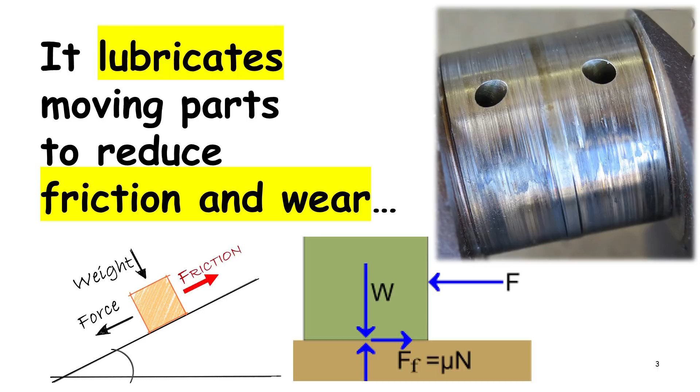But lubrication is only one of 6 key functions that oil performs in our engines. And actually, in my opinion, it's probably not even one of the most important ones. The reason I say that: obviously engines don't last very long running without any oil, and it is important to provide lubrication.

But it's important to understand that the lubrication requirements of our piston aircraft engines, at least the direct drive ones that turn the propeller right off the crankshaft, turn pretty slowly, typically 2,700 RPM redlines. The lubrication requirements of these slow turning Lycomings and Continentals are very modest compared to what we're used to with automobile engines that turn much higher revs.

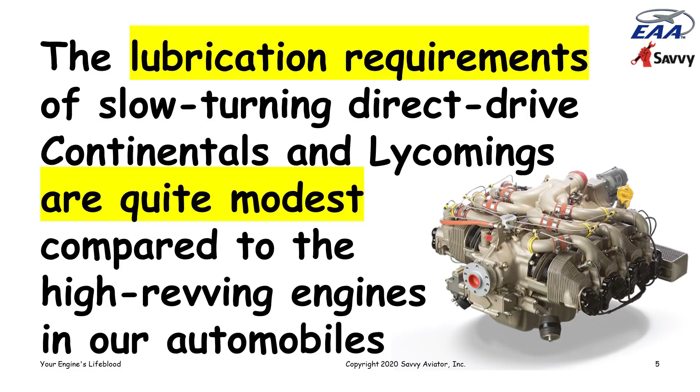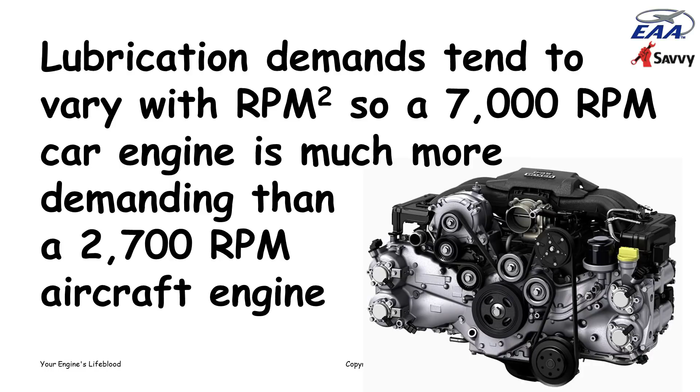And that's because lubrication demands tend to vary with the square of RPM. So a Subaru engine, which is the one I have pictured here, a particularly high revving engine, has a 7,000 RPM redline. Its lubrication requirements are vastly more demanding than our 2,600 or 2,700 RPM aircraft engines. But we will talk a little bit about friction and wear and how oil plays a role there, and then we'll talk about some of the other things that we depend on oil to do.

So the science of friction and wear is called tribology. Friction occurs because even the smoothest metal surfaces aren't really that smooth when you look at them very closely. What you're seeing here on the slide is a scanning electron microscope view of a polished metal surface, and you can see all of the little peaks and valleys on that surface. Those peaks and valleys are only microns in height, but that's what the surface of even a polished metal surface looks like.

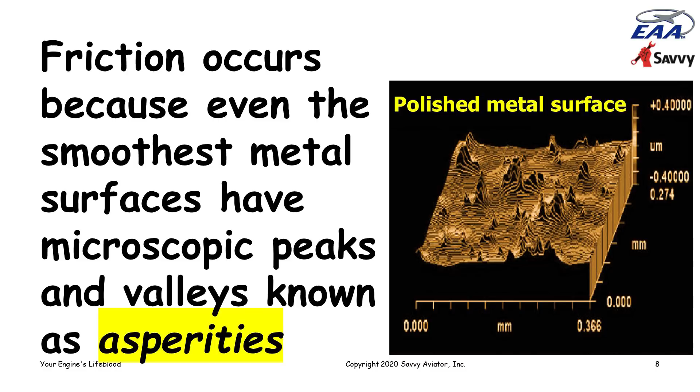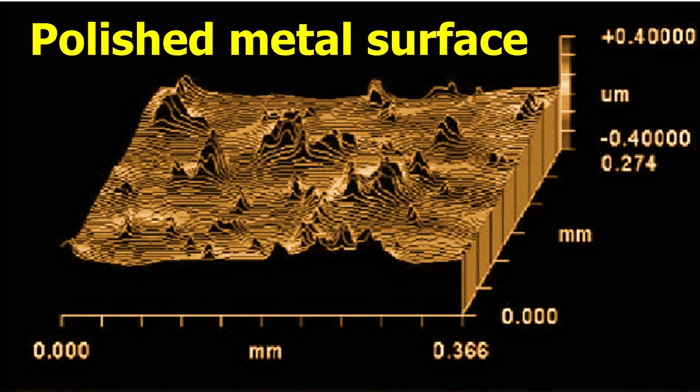The little peaks are known as asperities. Here's a closer look at that slide. The surface of even the most polished metal surface is just full of these little asperities. So if you have two polished metal surfaces moving relative to one another in close proximity, the asperities on the two different surfaces come in contact with one another, and they actually form little welds called micro-welds. As the parts move relative to one another, the micro-welds are constantly being formed and then fractured and then reformed and then fractured as the two surfaces move with respect to one another.

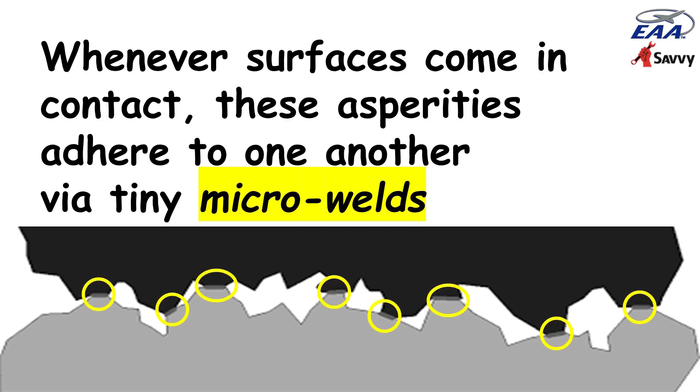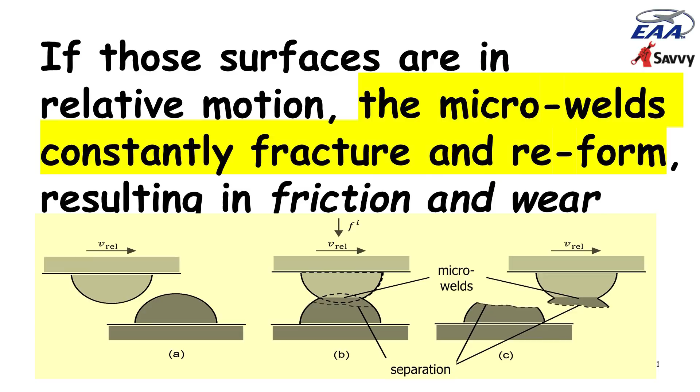Here's a more schematic diagram of that process, where the asperities contact with one another, form a micro-weld, and then as the relative motion completes, the micro-weld is fractured. You can see in the right-hand part of this schematic that part of the metal from the lower surface wound up being broken off and torn off by the upper surface. It's this tearing off of little pieces of metal that is the process that results in wear. So the asperities cause friction, and the fracturing of these micro-welds is the process that causes wear. Friction is the resistance to relative motion.

Wear is the loss of material that results from friction, and both are caused by the fracture of these little micro-welds. So that's where lubrication comes in.

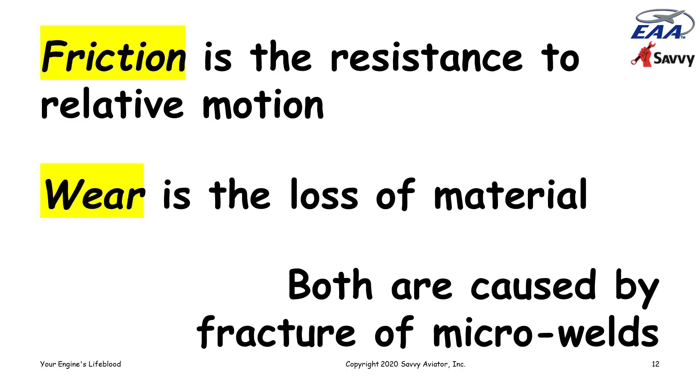The purpose of lubrication is to reduce friction and wear by preventing or trying to inhibit this process of micro-weld formation and fracturing.

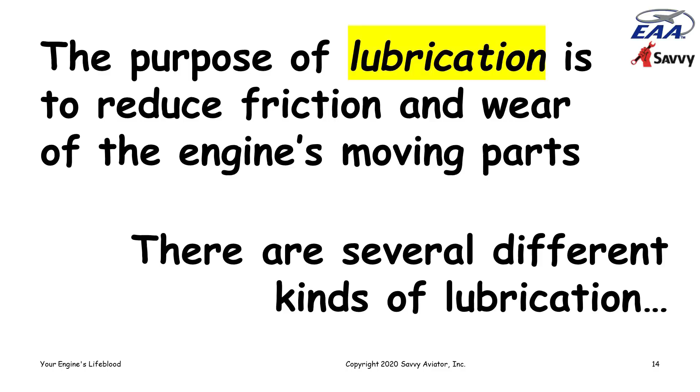There are several different kinds of lubrication that come into play under various circumstances. Probably the most important in our engines is something called hydrodynamic lubrication, which occurs when a fluid is interposed between the moving parts. It's typically a liquid like oil, although it can be a solid or a gas, but in our engines it's motor oil that's the fluid.

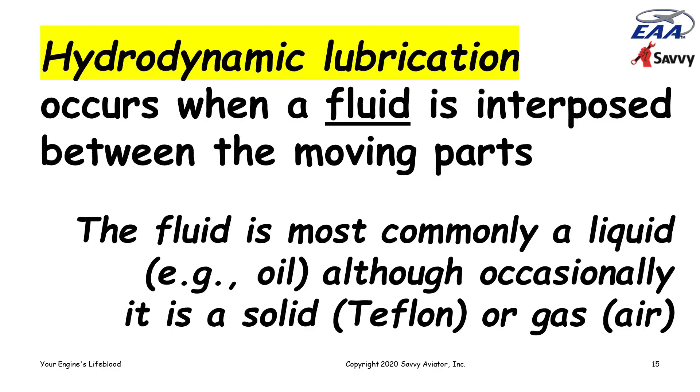The relative motion of the two surfaces creates a pressure in the fluid, and the pressure is sufficient if the relative motion is fast enough relative to the force that's pressing the two surfaces together. The relative motion creates enough pressure in the lubricant to keep the parts from touching one another.

That's actually called elasto-hydrodynamic lubrication, but it's the same principle. It's the relative motion of the parts, either the motion of the piston rings moving up and down on the cylinder walls, or the motion of the crankshaft journal turning inside of a main bearing, or the crank pin turning inside of a rod bearing.

But it's that relative motion that creates pressure in the lubricant fluid that forces the surfaces apart, so that their asperities don't actually make metal-to-metal contact. And if they don't make contact, then none of this micro-welding goes on. So it drastically reduces friction and wear.

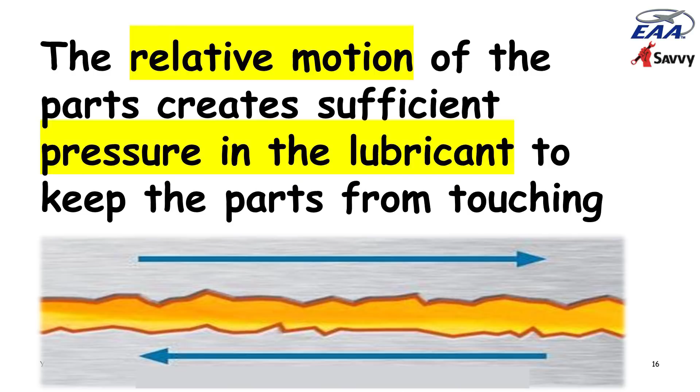This is a slightly difficult concept to visualize, this pressure caused by motion, but the best way to think about it is to think about a water skier who is supported on the surface of a lake because of the motion of the water skier being pulled by the towboat.

If the motion slowed down, the pressure that's holding that water skier up would reduce, and eventually the water skier would start sinking. So it's the motion that creates the pressure in the fluid.

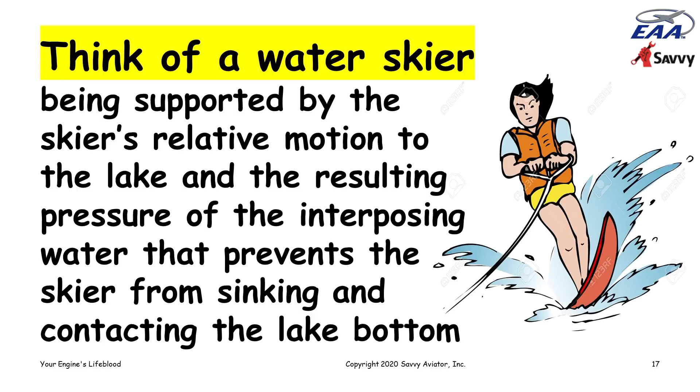Another example of this that we're all familiar with is hydroplaning. If a car is driving on a wet road and it's going fast enough, the pressure of the water interspersed between the road and the tires becomes great enough to actually lift the tires right off the road and eliminate the friction that lets you control the car. So that's the same principle involved in hydrodynamic lubrication.

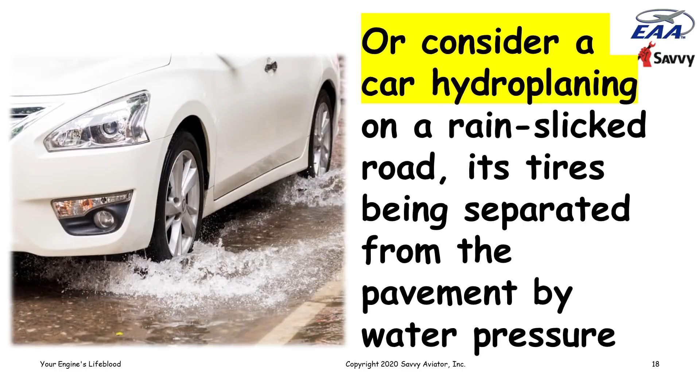Now, hydrodynamic lubrication works well if the relative speed of the parts is high enough to overcome the load pushing them together. In the same way that the speed of the towboat has to be great enough to overcome the weight of the water skier that's trying to sink down to the bottom of the lake.

But if the speed is not sufficient relative to the load pressing the surfaces together, then there won't be enough lubricant pressure to keep the parts separated.

So if you think, for example, of the piston rings running up and down inside the cylinder walls, in the middle of the piston stroke, the speed of the piston rings moving over the surface of the cylinder walls is quite high, and so there's a lot of pressure built up in the oil film that keeps the rings from touching the cylinder wall. But as the piston gets up near top dead center, it gradually slows to a stop and then reverses direction and starts going the other way.

And as it's slowing and reversing, the speed of the piston rings traveling over the cylinder wall reduces gradually to zero, momentarily. So the pressure that's holding those piston rings off the cylinder walls goes away.

And that's one of the reasons why, if you remove a cylinder that's been in service for a while, you'll typically see a pretty well-defined wear step right up at top dead center where the piston rings were reversing direction, because that's where the hydrodynamic lubrication breaks down.

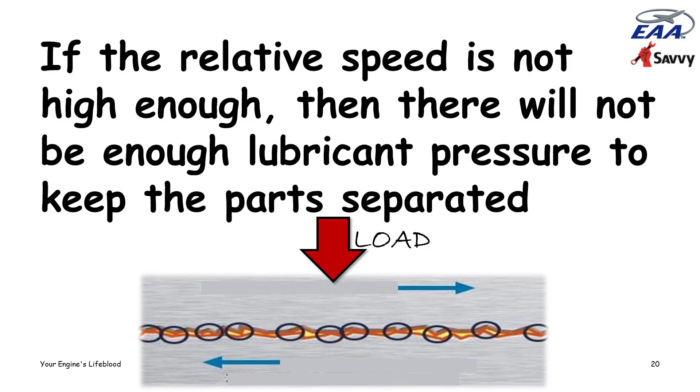So what do we do in circumstances where there's not enough relative motion to keep the loaded parts separated? Well, then we have to rely on a different kind of lubrication known as boundary lubrication. Boundary lubrication is lubrication that we depend on where the parts actually are in metal-to-metal contact with one another, because there's not any way to keep them separated.

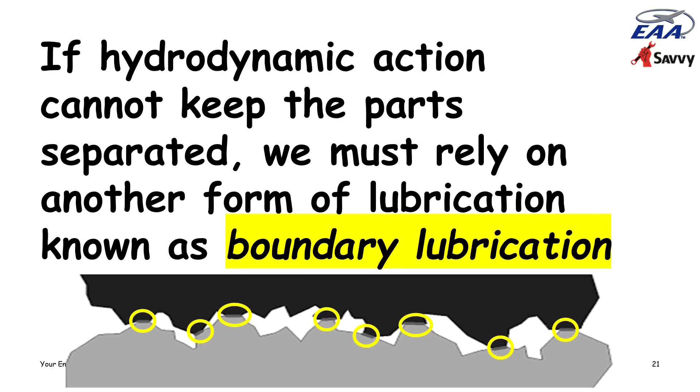Boundary lubrication relies not on the base oil itself, but on an additive package that's added to the oil. It's actually typically a pretty complicated additive package that is a combination of ingredients called anti-wear additives and extreme pressure additives, and they chemically interfere with micro-weld formation as opposed to mechanically interfering with it by keeping the parts separated.

Anti-wear and extreme pressure additives both do pretty much the same thing. They chemically interfere with the micro-welding process that causes friction and wear. They're activated in different ways. Anti-wear additives are typically activated by temperature, and extreme pressure additives are activated by pressure.

And most engine oils contain a combination of anti-wear and extreme pressure additives that are optimized to provide boundary lubrication in those areas where hydrodynamic lubrication is not possible.

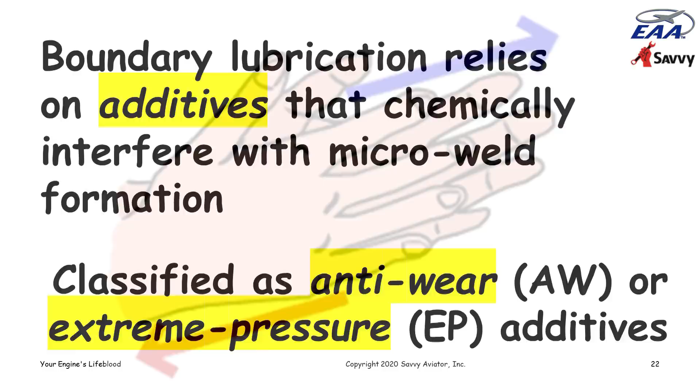So just as a thought experiment, imagine you rub your two hands together vigorously. If you do that, you'll feel the friction between them, and you'll actually feel the surfaces of your hands heating up. Believe it or not, what's actually happening is that zillions of little micro-welds are being formed and broken between the palms of your hands. There'll be more friction if you do this right after you wash your hands, because if you haven't washed your hands recently, the skin exudes a little oil film on your palms that will provide some lubrication when you do this.

But if you wash your hands and then do it, it'll be even more obvious. Now, if you want to reduce the friction between your two hands as you're rubbing them together, there are a couple of different things you can do. You could coat your palms with Vaseline, for example, and that would drastically reduce the friction when you're rubbing them together by providing hydrodynamic lubrication. Or you could sprinkle talcum powder on your hands, and talcum powder would actually be providing more like boundary lubrication between the two hands rubbing together.

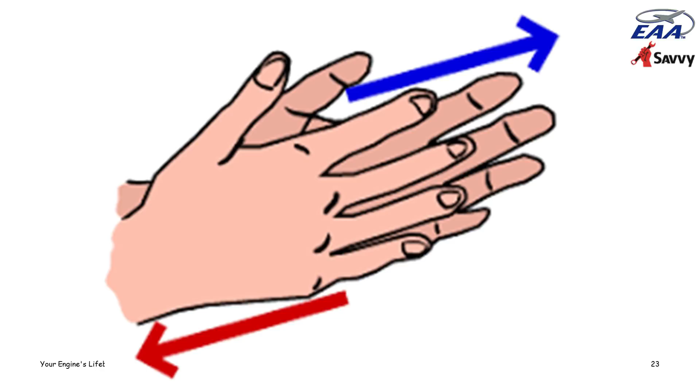So tribologists talk about three different kinds of lubrication: hydrodynamic lubrication, which occurs when you have a relatively low load and relatively high speed that provides enough lubrication pressure in the lubricant to keep the parts separated so they don't touch. Boundary lubrication, where you don't have that pressure and the parts are touching, and you're depending on chemical interactions to inhibit the formation of the micro-welds.

And then in the middle, there's what they call mixed lubrication, where there's enough pressure to reduce the contact between the asperities of the opposing parts, but not enough to completely eliminate them. So you're dependent on a mixture of hydrodynamic lubrication and boundary lubrication to minimize friction and wear.

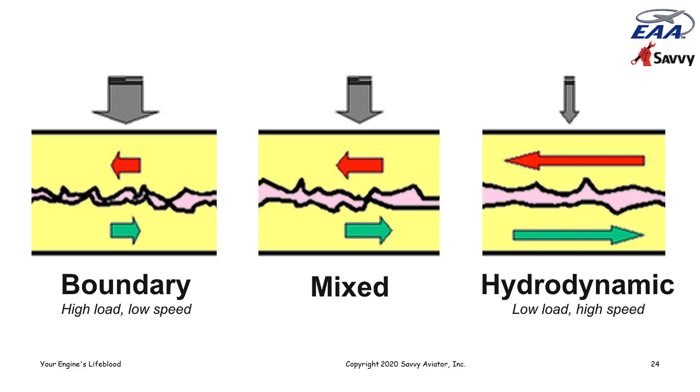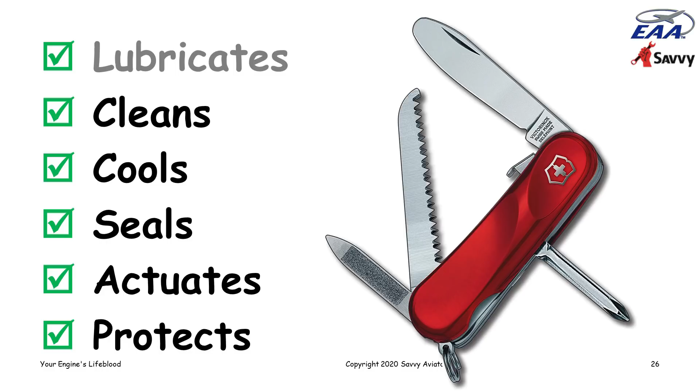So that's about as far as I'm going to go with our little tribology lesson here. Let's talk about the other things that engine oil does. In addition to lubrication, which is what we've just been talking about, we rely on engine oil to clean the engine, to cool it, to seal, to actuate, and protect. I'll talk about each of those briefly. We already talked about lubrication.

Cleaning is a super important function of aircraft engine oil, much more important than in automobile oil. And that's because aircraft engines are literally filthy. They're filthy for a couple reasons. First of all, they're air-cooled engines, so the mechanical tolerances are much, much looser than they are in automobile engines, which are typically water-cooled and held at a much more constant temperature.

Because aircraft engines have such sloppy tolerances, plus they have these enormous pistons and cylinders compared to car engines -- since they turn so slowly, they have to have very, very large displacements -- the area that has to be sealed up by the piston rings is enormous. And an awful lot of combustion byproducts blow past the ring pack in aircraft engines, much more so than in car engines, and get into the oil.

And contaminate it. So it's very, very important for aircraft engine oil to be able to cope with all of this filth, and to prevent the filth from creating deposits on the inside of the engine, to eliminate sludge.

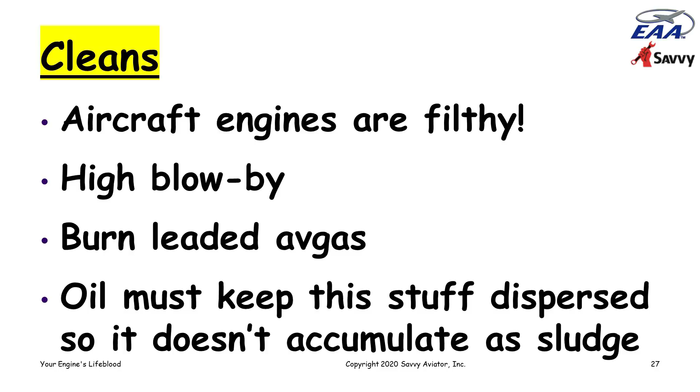We'll talk a little bit more about this in a few minutes. But the ability of the oil to keep the engine clean is super, super important in piston aircraft engines, much more so than in automobile engines.

Oil in our engines is also a very important coolant. We think of aircraft engines as being air cooled, but if you think about it, there are an awful lot of components that aren't air cooled, and pistons are the most obvious. Pistons are part of the combustion chamber. They run extremely hot. They don't have any cooling fins. They don't have any airflow over them. They're not like cylinder heads or cylinder barrels that we can cool with airflow.

The only way pistons get cooled, and they're made of aluminum, which has a really low melting point, so the only way we can keep pistons cool and prevent them from melting is to splash copious quantities of oil onto the bottom of the pistons to carry away the heat. So pistons are not air cooled, they're oil cooled. They're cooled by splash oil.

And in fact, as the oil goes through the engine, circulates through the engine, every pass that it takes through the engine, it absorbs enough heat from the pistons and various other hot components that it gains about 40 degrees Fahrenheit on the average in oil temperature as it circulates. And then typically it winds up going through an oil cooler, which dissipates that heat, basically it's a radiator that cools the oil back down and dissipates the heat into airflow.

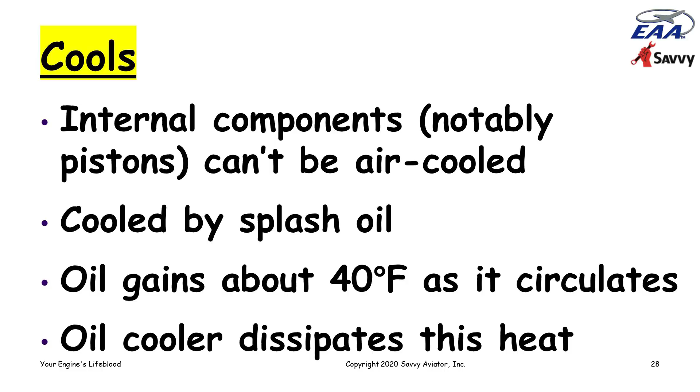Oil performs an important function as a sealant in our engines to prevent the leakage of gases and liquids past places that we don't want them to leak. The oil is part of the seal between the piston rings and the cylinder walls. As I mentioned, for most of the stroke, the oil keeps the piston rings physically separated from the cylinder wall in order to reduce friction, and so the oil actually becomes a sealant that is partly responsible for keeping the combustion gases in the combustion chamber.

Oil is an important sealant at other kinds of seals, O-rings and gaskets and so on. So it represents an important sealant.

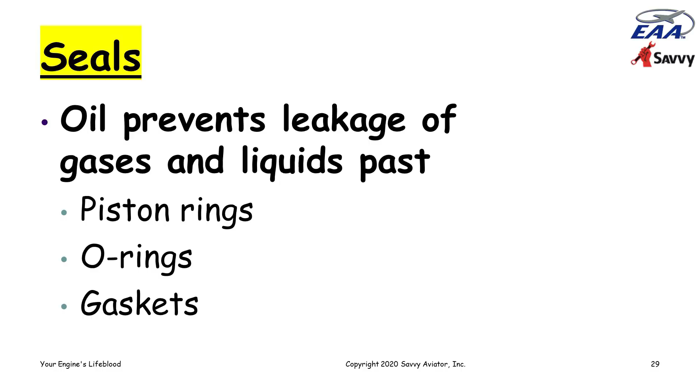In some of our engines, many of our engines, oil is used as a hydraulic fluid to actuate things. If you have a constant speed prop, the propeller pitch is regulated hydraulically using oil pressure. If you have a turbocharged engine with an automatic wastegate, the wastegate is actuated normally through a hydraulic actuator that uses oil pressure to control it. So that's yet another function of engine oil, is as a hydraulic fluid.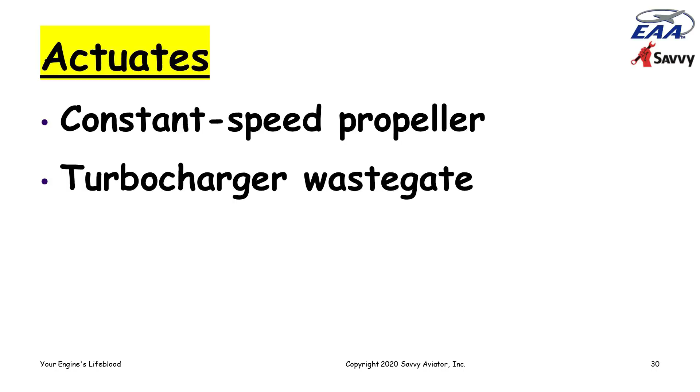And finally, but certainly not least importantly, maybe even most importantly, we rely on engine oil to protect our engines, specifically to protect the ferrous metal parts against rusting. And the problem here is that we fly our airplanes a lot less often and a lot less regularly than we drive our cars. At least most of us do. I'm certainly guilty of that, unfortunately. And so the engines sit around a lot, and they have the opportunity to corrode, which is the single biggest enemy of engines reaching TBO.

Engines that don't reach TBO typically don't reach TBO not because they wore out. We almost never wear our engines out. It's because they rusted out. And we rely on oil to protect the engine against rust and all kinds of ferrous metal parts, which are vulnerable to rusting.

Crankshafts, camshafts, lifters, cylinder walls, the gears in the accessory case - all of those are made of steel, or in the case of lifters, chilled cast iron, but all of them are capable of rusting. And the only thing that prevents them from rusting is a protective oil film. And so the integrity of that oil film and the thickness of it and the long lastingness of it and the various corrosion inhibiting additives are all things that are super important in engine oil for piston aircraft engines.

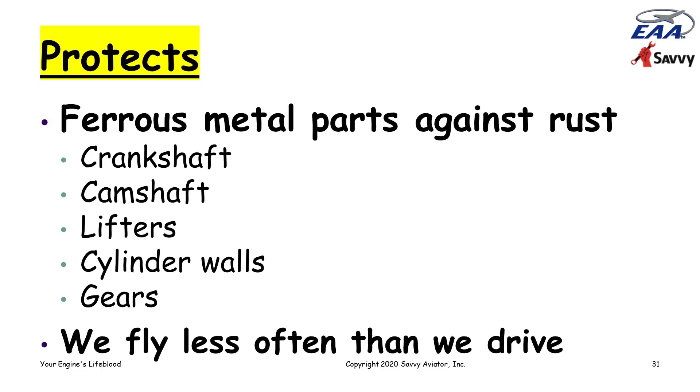And again, the protection function is much more important in aircraft oil than it is in automobile oil, because automobile engines tend to be run every day or every couple of days, and so the protective oil film is constantly being replenished. Aircraft engines, unfortunately, sometimes sit around for weeks or even months at a time without running, which is really pretty bad for the engine. And we need to choose an oil that has the ability to keep up a protective barrier on the engine to preserve the parts and not let them rust.

Talk for a minute about polymers.

Polymers are mammoth molecules, big giant molecules that are very important, and they make up most of our engine oil. Some polymers are natural, like mineral oil, things that we drill up out of the ground that came from dead dinosaurs. Others are man-made polymers, the synthetics. The two most common synthetic base oils are called polyalpha olefin, or PAO, and polyalkylene glycol, PAG.

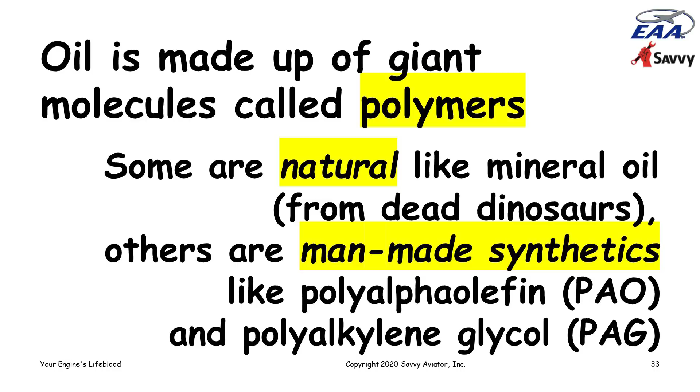These different polymers that make up the base stock of engine oil have differing shapes. Generally, mineral oil is a much more branchy kind of molecule. These are highly simplified diagrams just to get the idea across. Synthetic oil tends to be a lot smoother and less branchy.

Now, the advantage of synthetic oil, of having this nice smooth molecule that doesn't have a lot of side branches, first of all, is that synthetic oil is slipperier. It has greater lubricity, I guess is the correct term.

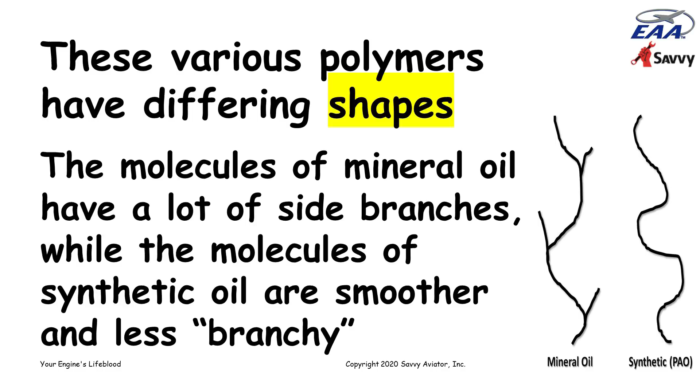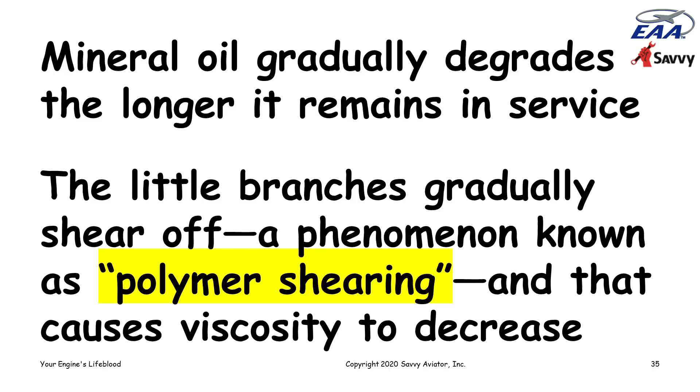Also, it's longer lasting. Mineral oil gradually degrades the longer it remains in service, because as the mineral oil sits between a pair of moving surfaces, the little side branches on the polymers tend to shear off, a phenomenon called polymer shearing, which causes the viscosity of the mineral oil to decrease over time, whereas synthetic oil tends to hold its viscosity constant over a much longer period. That's why synthetic oil, because it's less branchy and doesn't suffer from polymer shearing as much and retains its viscosity better, can go a lot longer between oil changes in automotive applications.

But that's not so much true in aviation applications. The reason is that when we change the oil in an airplane engine, we're typically not changing it because the oil has gotten old and broken down. We're changing it because it's full of filth that we want to get out of the engine. The oil only has a capacity for holding so much filth before it starts settling out and creating sludge. So our oil change intervals in aircraft are really more filth driven than driven by the breakdown of the oil itself.

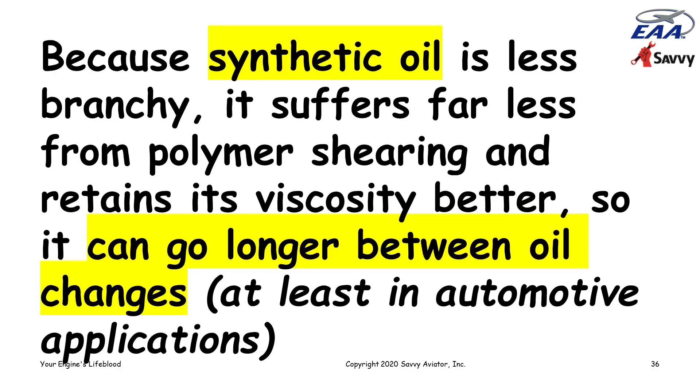And mineral oil's branchy molecules, although they're not as slippery, do a much better job of holding particulate contaminants in suspension so that they can be drained out at the next oil change.

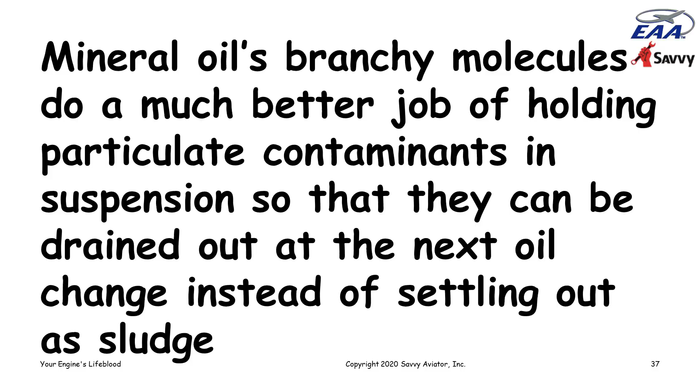This was highlighted back in the 90s when Mobil introduced an aviation version of its Mobil 1 synthetic oil, which was very successful as an all-synthetic automotive oil. Mobil introduced an aviation version called Mobil AV1, which became very popular for a while. Then all of a sudden people started realizing it was wrecking engines, because the engines were getting loaded up with lead sludge. It turned out that this all-synthetic oil, which I think was polyalpha olefin based,

simply couldn't deal with the lead blow-by in piston aircraft engines. So these engines would get contaminated with lead sludge. Ultimately, Mobil pulled AV1 off the market in a hail of class action lawsuits from owners whose engines had been ruined by it. Since that happened, there have been no all-synthetic aircraft engine oils on the market.

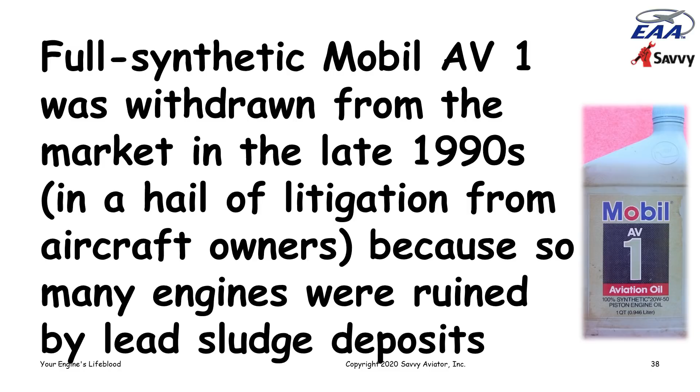There are some semi-synthetics on the market, notably Aeroshell 15W50, which is 50% synthetic and 50% dead dinosaurs. But this just goes to illustrate that synthetic oil, although it has a lot of advantages, has one gigantic disadvantage in terms of piston aircraft oil: it simply doesn't deal with filth very well.

Even with a semi-synthetic like Aeroshell 15W50, which is only half synthetic, we've seen a lot of very serious lead sludge problems, causing premature removal of cylinders, premature escalation of oil consumption, and so on, in engines that have large displacements and small oil sumps. The place we've seen this the most, mostly because we manage a lot of these airplanes, is in the Cirrus SR-22. The Cirrus SR-22 is powered by a Continental IO-550N engine, which has a very big displacement, 550 cubic inches, and a very small oil sump.

It only has an 8-quart capacity, and most owners run it at about 6 quarts, because if you run it at 8 quarts, it kicks the first 2 quarts out the breather pretty quickly. So you're asking a small quantity of oil, 6 quarts, to absorb the filth from a very, very large displacement engine, a 550 cube engine. And if the oil you're using is a semi-synthetic, where half of it can't hold lead sludge in suspension because it's synthetic, you're basically asking 3 quarts of oil to hang on to all of this lead sludge, and it just can't do it.

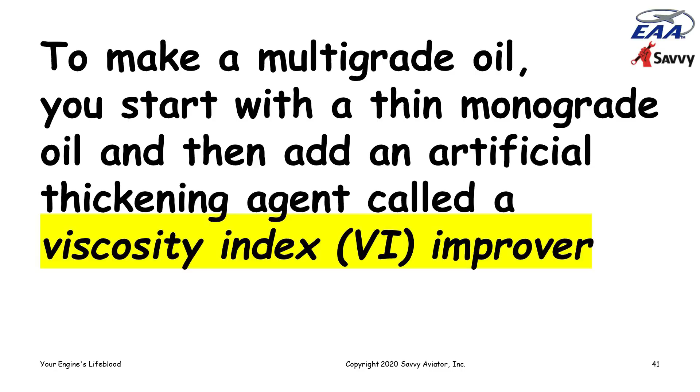Let's talk a little bit about monograde versus multigrade oil. To make a multigrade oil, like Aeroshell 15W50 or Phillips 20W50, you start with a thin monograde oil, then add an artificial thickening agent. This is a man-made polymer called a viscosity index improver, or VI improver. It's a polymer that rolls up in a tight little ball, but as it warms up, the ball unfolds. The result is that this VI improver has the unusual property that its viscosity increases—it gets thicker and more viscous when heated, which is exactly the opposite of what mineral oil does. Mineral oil gets thinner as it's heated, while VI improvers get thicker as they're heated.

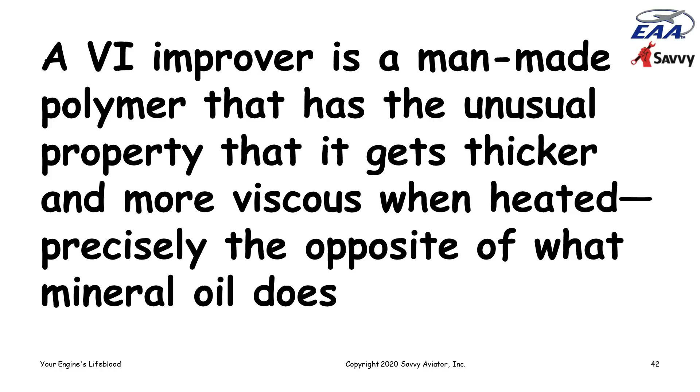So by mixing VI improver into mineral oil, you can get pretty much whatever viscosity index curve you want—in other words, how the oil's viscosity varies with temperature. You can control it to do whatever you want by having the right balance of oil and VI improver. Now, you don't want too much VI improver in the oil, because it isn't a very good lubricant, so we want the oil to be mostly oil. Typically in multigrade oils, about 10% is VI improver. That's how multigrade oil works: it's a thin oil to which this unusual molecule—which balls up when cold and unrolls when warm—is added to create the appropriate viscosity index curve that is desired.

So a multigrade oil rated as 20W50, like the Phillips XC product, is basically an SAE 20 oil to which about 10% VI improvers are added to obtain a viscosity of SAE 50 oil at 100 degrees Celsius, the boiling point of water, while maintaining SAE 20 at freezing, 0 degrees Celsius. That's what the 20W50 rating means—it means the oil measures SAE 20 at freezing and SAE 50 at boiling, and that's how these ratings work.

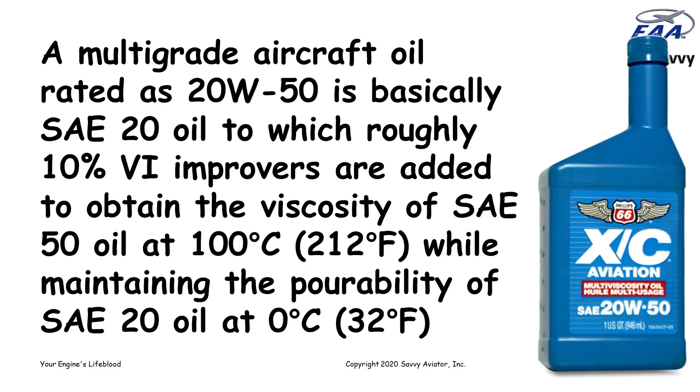This is accomplished by taking a thin oil, like SAE 20 or 15, and adding enough VI improver to thicken it up to the degree desired at operating temperature. At full operating temperature, we optimally look for oil temperature on the gauge of about 180 to 200 Fahrenheit—that's just about perfect. By the way, that temperature on the gauge is the temperature of the oil at the coolest part of the cycle. At the hottest part of the cycle, it's about 40 degrees higher. So if you see 200 on the gauge, the oil temperature varies from about 200 as it passes the probe up to about 240 at its hottest point, right before it enters the oil cooler.

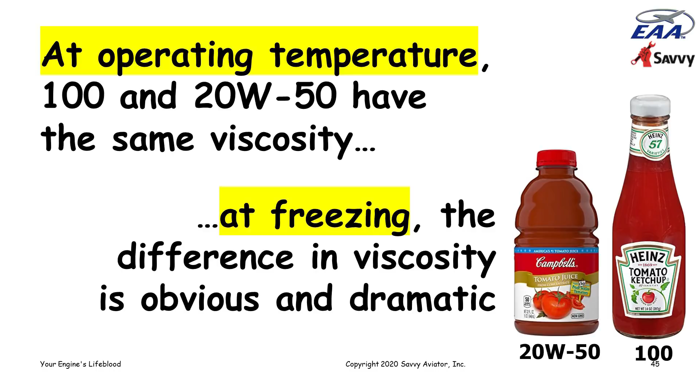But at operating temperature, in the 200-ish area, boiling point of water-ish area, Aeroshell W100 and Phillips 20W50 have the same viscosity—they're both SAE 50 oil. But at freezing, there's a huge difference in pourability. The 20W50 oil pours like tomato juice, and the monograde oil, the 100 grade SAE 50 oil, pours like ketchup. But they have pretty much the same viscosity up at operating temperature.

Now let's talk a little bit about additives. Oil additives are absolutely vital for both lubricity and longevity of the engine. Without them, the oil would become contaminated, it would break down, it would leak out, and it would not properly protect the engine parts against rust.

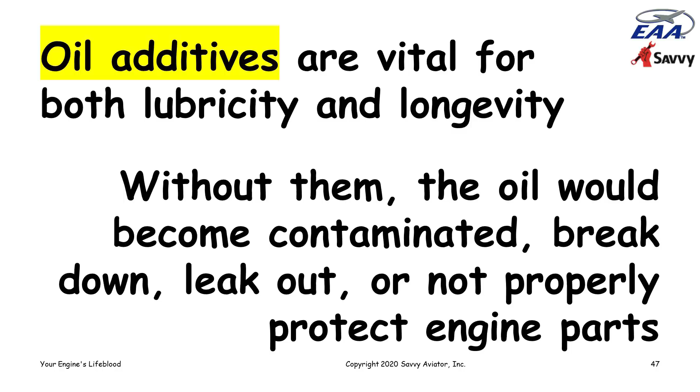Typical aircraft oil is something like this. It's 3/4 or so base oil and 1/4 a combination of various additives, VI improvers if it's a multi-grade oil, and a cocktail of anti-wear, anti-corrosion, and other kinds of additives that we'll briefly touch on here.

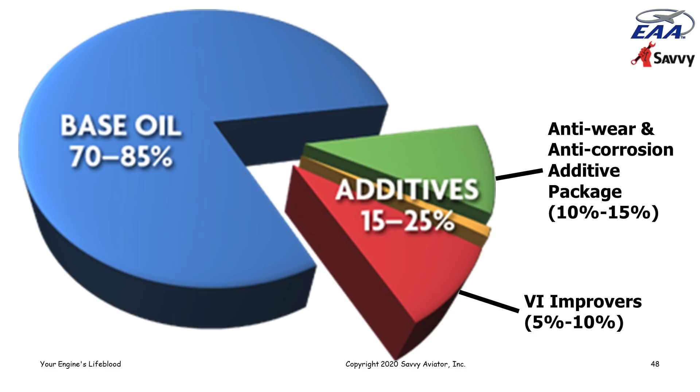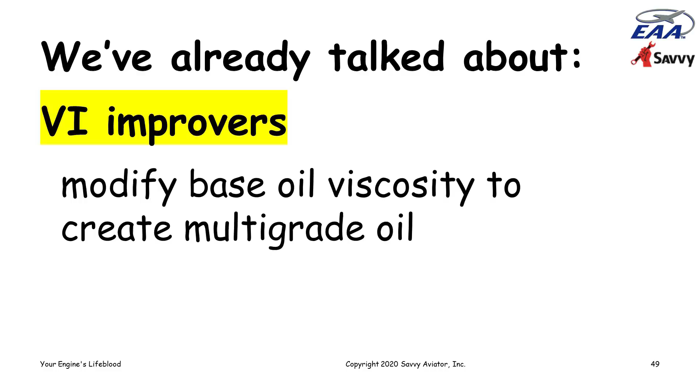We've already talked about VI improvers. Those are those magic little balled up polymers that modify the viscosity of the base oil to create a multi-grade oil. And we've talked about anti-wear and extreme pressure additives that chemically react with metal surfaces to inhibit micro-weld formation chemically in the boundary layer regime, where we don't have enough lubricant pressure to keep the parts separated. Anti-wear and extreme pressure additives pretty much do the same thing, but they're activated a little differently.

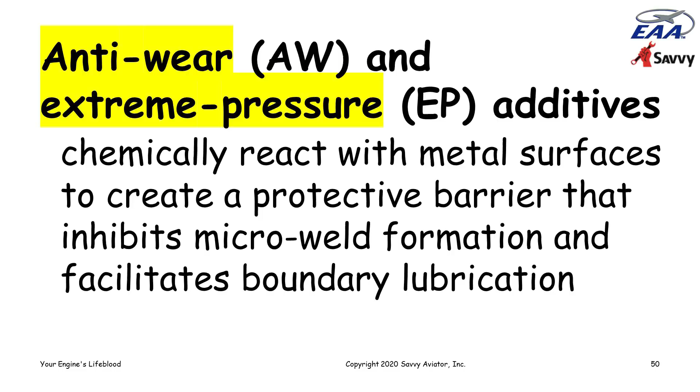Anti-wear additives are typically temperature activated. Extreme pressure additives are pressure activated. So, for example, what we depend on to prevent cam and lifter wear is primarily extreme pressure additives, because those parts run pretty cool, but they're under extremely high pressure at the contact points. And so we rely on an extreme pressure additive such as triphenyl phosphate, which is the stuff that's in that Lycoming LW16702 snake oil additive. It's an extreme pressure additive used to help increase boundary lubrication at the cam and lifter interface.

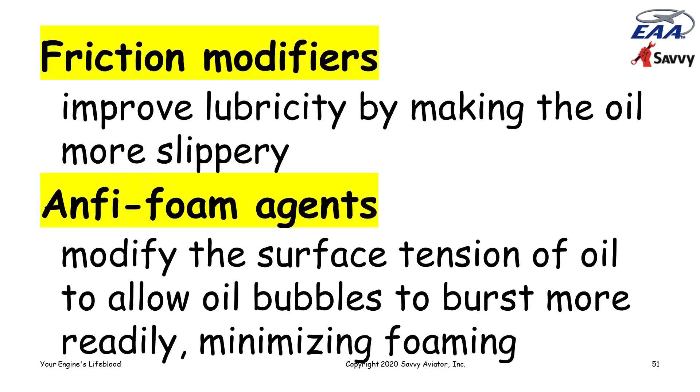Or friction modifiers that improve oil lubricity by making the oil more slippery. There are anti-foaming agents that modify the surface tension of the oil so that it doesn't create a lot of bubbles. It allows the bubbles to burst and minimizes foaming. Corrosion inhibitors, super important additives,

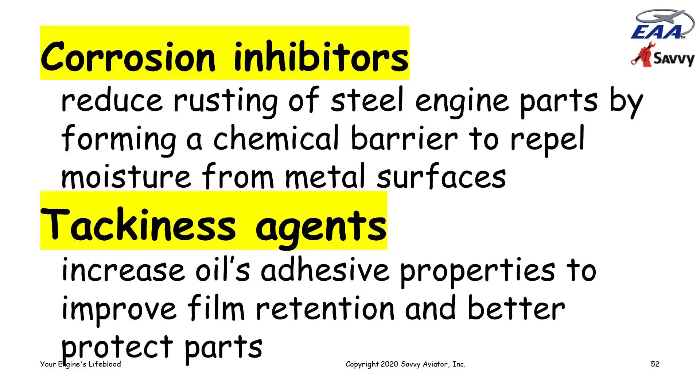that help reduce the rusting of steel engine parts by forming a chemical barrier. They're polar chemicals that form a barrier on the metal to protect them from moisture when the engine is inactive. Tackiness agents increase the oil's adhesive property to keep the film stuck to the parts and protect them better.

We have acid neutralizers. There's a lot of water created when an aircraft engine runs because the combustion of hydrocarbons creates two chemicals primarily: carbon dioxide and water. Most of that water goes out the exhaust pipe in the form of steam, but some of it blows by the rings and gets into the bottom end of the engine and builds up in the oil.

You can tell that when you come in from a flight, you pull the dipstick out. Typically the oil cap is covered with moisture and stuff, and that's moisture that was generated by the process of combustion and got into the bottom end of the engine because it blew past the rings. That water combines with sulfur and other things to create sulfuric acid, some hydrochloric acid, and some carbonic acid.

So the oil has to have acid neutralizers that will neutralize the acid and protect the engine from buildup. And of course, those acid neutralizers are consumed in the process of neutralizing acid. So the oil only has a capacity to neutralize a certain amount of acid, which is another reason we want to drain it regularly in order to put fresh oil in and put a brand new additive package back into the engine.

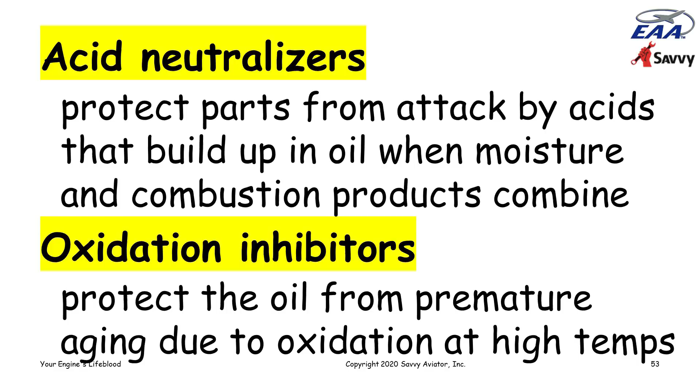There are oxidation inhibitors that prevent the oil from premature aging at high temperatures. And there are detergents and dispersants which help keep engines clean and free of deposits by holding combustion contaminants in suspension and preventing them from forming sludge and varnish deposits.

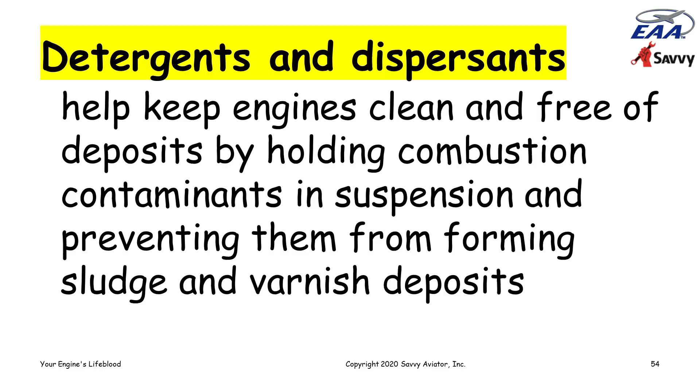Now, the difference between a detergent and a dispersant is basically that a detergent dissolves and cleans the sludge off once it's formed. And a dispersant holds the particulate matter in suspension and prevents it from precipitating out as sludge.

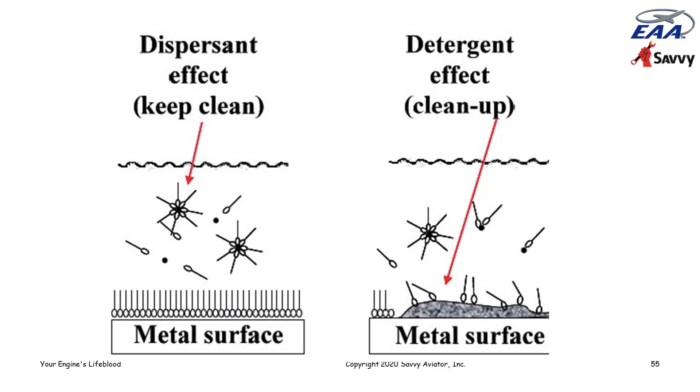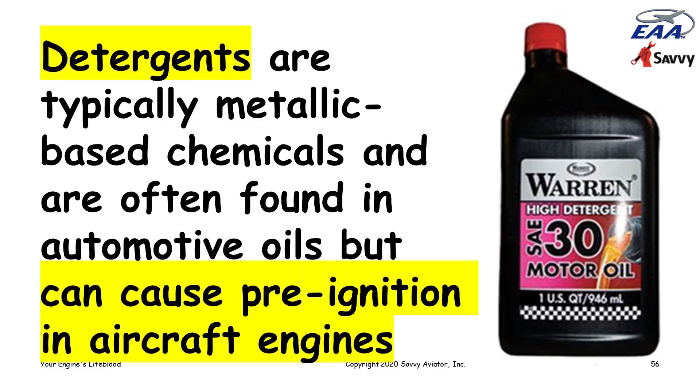Detergents are typically metallic-based chemicals, typically have zinc in them. They're often found in automotive oils, although there's sort of a trend towards non-detergent automotive oils. But detergents, because they're metallic, can create ash that can cause pre-ignition in aircraft engines. And so we don't use detergents in aircraft engine oil anymore. We still use them sometimes in motor oil for cars, but not in aircraft engine oils.

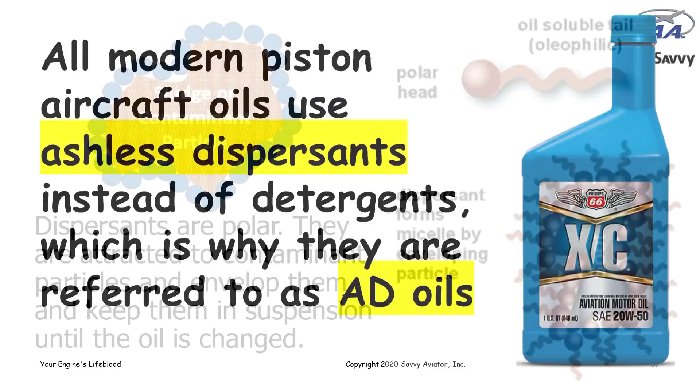We use dispersants instead, which is why piston aircraft oils are called ashless dispersant oil, or AD oil. The dispersant is basically a polar chemical with a head that's attracted to contaminants and a tail that's soluble in oil, and they form a little capsule around the particulate matter and keep it suspended and prevent it from forming sludge until we can drain it out at the next oil change.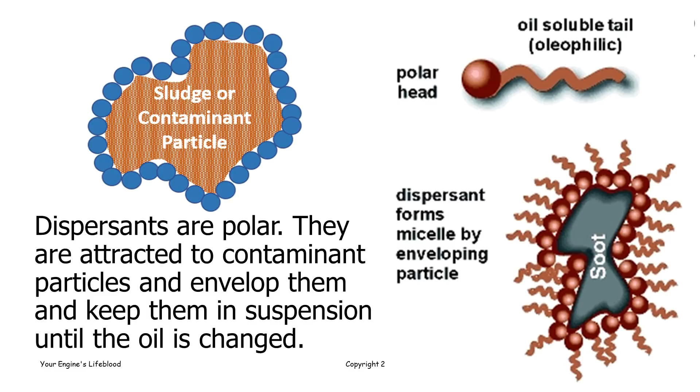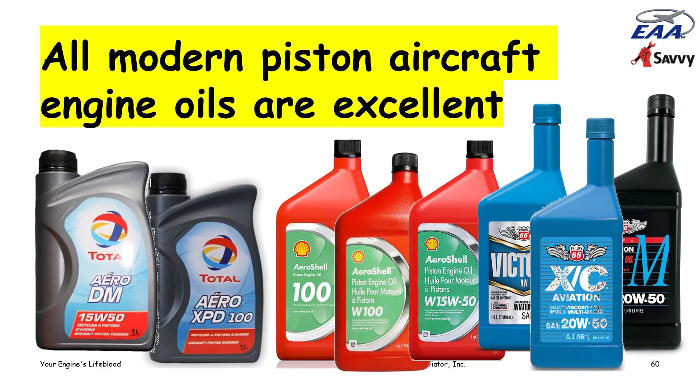So, bottom line, what oil do I recommend? Look, all of the piston aircraft engine oils on the market today are excellent oils, and there's a pretty wide range of oils available.

They all do a good job if you change the oil and filter regularly, and I recommend at least every 50 hours or 4 calendar months, whichever comes first. If you fly a lot, it'll be every 50 hours. If you don't fly as much, it'll be 4 calendar months. But we want to get the filth out of the engine, so we want to drain the oil regularly. Our oil change intervals for aircraft engines are not driven so much by oil breakdown. They're driven by filth, and how much filth the oil can hold in suspension.

We really want to get rid of it, and also how much acid it can neutralize, stuff like that. And also trying to keep your oil temperatures in the sweet spot, which is in the 180 to 200 degree range, as indicated on the gauge.

If the oil temperature is much higher than that, say higher than 210, for a prolonged period of time, the oil will tend to oxidize and break down. If the oil temperature is much lower than that, say below 170 degrees for long periods of time, then the moisture will tend not to be boiled off and expelled from the engine through the breather, and you'll tend to get a moisture buildup and an increased possibility of corrosion. So that's why this is kind of the sweet spot.

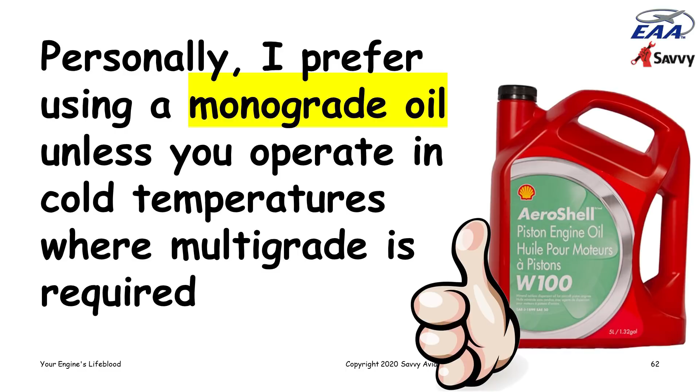As I mentioned, I don't like synthetic or semi-synthetic oils for engines that run on leaded avgas. There aren't any full synthetic oils available right now for aircraft engines, unless you're running a Rotax or something. But 15W50 Aeroshell is one of the most popular oils, and it's semi-synthetic. And if you're running leaded avgas, particularly if you're running a large displacement engine with a not so large oil sump, I would steer clear of the semi-synthetic.

Again, once we get to the point where we're running unleaded fuel, then synthetics will be the oil of choice. But as long as we're running leaded avgas, I think it's a good idea to stay away from synthetics. And so for my clients that need to run multigrade oil, I normally steer them towards the Phillips product because it's 100% dead dinosaurs, no synthetics.

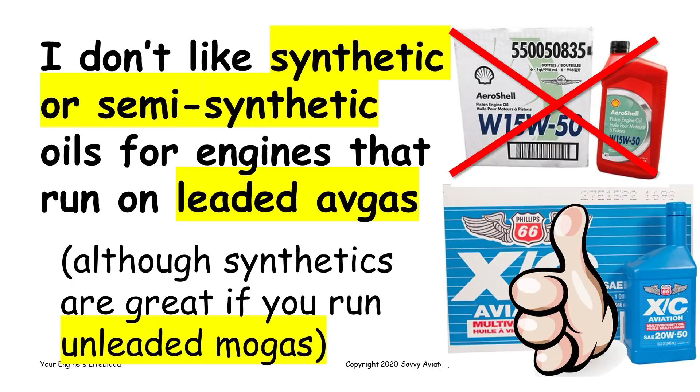And finally, I've become a big fan of an oil additive called ASL CamGuard because it has outstanding anti-rust properties. It's the best thing I know of to prevent rusting of an engine that's used irregularly, like a lot of our owner-flown airplanes are, and certainly mine is.

It also has a very good anti-wear package in it, and so I've been using CamGuard, Aeroshell W100 monograde plus CamGuard in my Cessna 310 for decades, and I've gotten phenomenal longevity out of my engines doing that. And my engines are not really the poster child for lasting long, because I fly irregularly, and my airplane is based pretty close to the coast, which is a high corrosion environment. And yet, with this combination, I've done extraordinarily well.

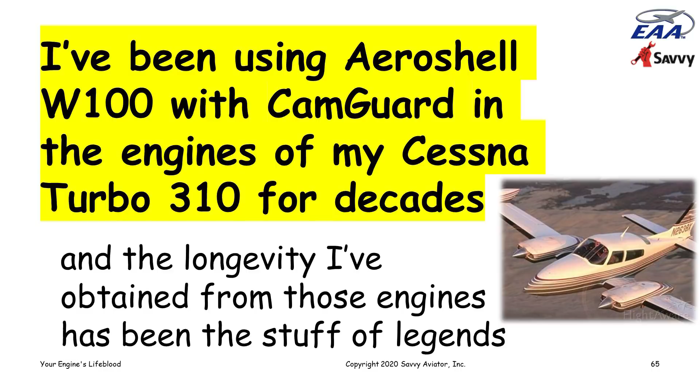So key takeaway from all of this in selecting your oil and additives for your engine: I think more than lubrication, probably the two most important considerations are picking an oil that will do a good job of inhibiting corrosion, and I like a nice gooey, thick single weight oil with something like CamGuard added to it, and dealing with filth. And for that, I like using dead dinosaurs, not synthetics, and draining it on a very regular and fairly frequent basis. Once we start running on unleaded avgas, we'll have a lot less filth, and we'll be able to change our equation a little bit.

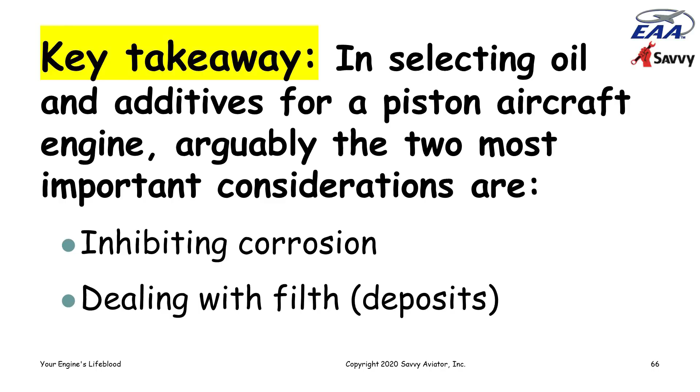That was pretty long, Tim, but that's all I have. So I guess we probably got a half an hour for some Q&A.